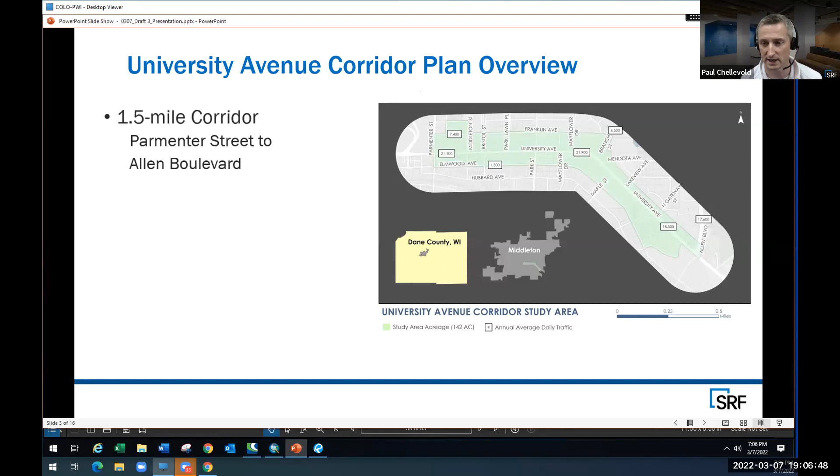We want this to be a corridor for all. We want it to become less auto-centric, or if it's going to stay as auto-centric as it is, we at least want to put in recommendations to increase transit use. So a little about the corridor itself: it's 1.5 miles, including Parmenter Street on the west, traveling eastbound towards University Avenue to end at Allen Boulevard. We included 1 block north and 1 block south, so Franklin and Elmwood Avenue, and considered some of the development around Middleton High School, understanding how people access the school and use University Avenue as part of this.

As we put this together, we put 5 chapters in front of you tonight. After a brief introduction of why and what we're planning for, we set up the existing conditions to really set the tone for chapter 5, the recommendation. So the existing conditions preface the recommendations that will come through chapter 5.

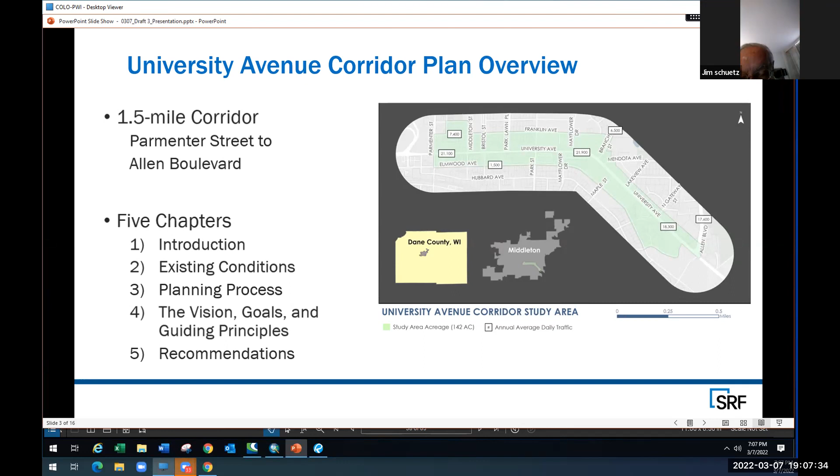We included a comprehensive and robust planning process throughout, and I'll explain the elements we did to include that and the feedback we received. We also wanted to develop visions and goal statements, aspirational principles over the 10 to 20 year time period.

As I discussed the planning process, we really began back in July, and it kicked off with a half-day kickoff meeting and ad hoc meeting. Council put together the ad hoc committee that would be responsible for overseeing the development of the document, as well as providing input on the deliverables at various times throughout the process.

That same day after the kickoff presentation, we all put on these yellow vests and participated in a 3-mile corridor walking tour. We started at City Hall, went all the way down the corridor and then all the way back. That was an opportunity for us to collect and hear firsthand the comments from the people who know and live and breathe this corridor the most, to see if us as residents, us as consultants, had a lot of the same opinions, or if there were differing opinions or objectives throughout the way.

Then once we knew what the issues were, we developed a 20-question online community survey. The survey was given on multiple platforms - we used links, QR codes, hard copies, libraries, senior citizens.

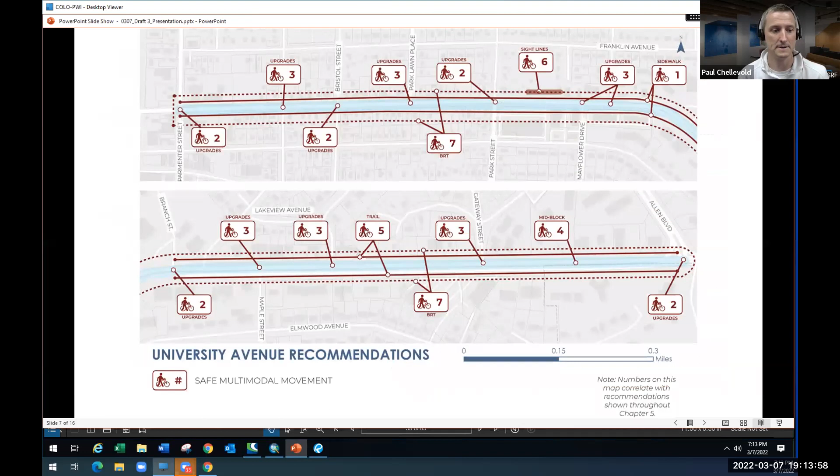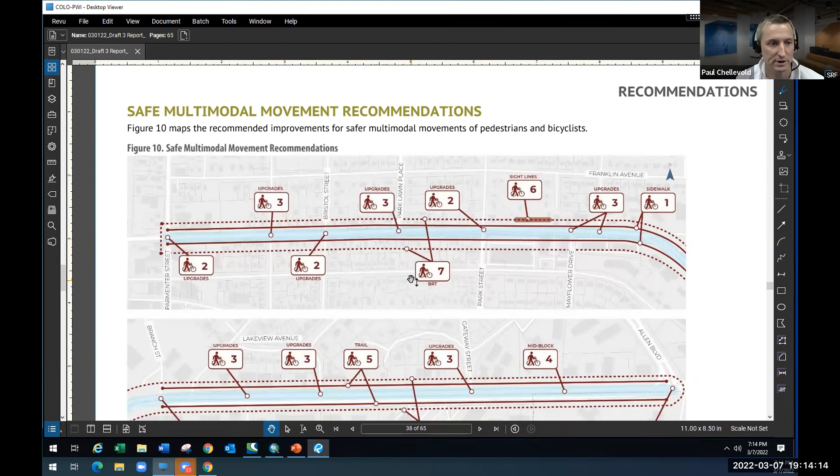Maybe what I'll do here, since it's easier to see for me, is explain the next slides this way. This is straight from the document, around page 38, which is what our agenda kind of focused on—page 38 and forward.

For the multimodal upgrades, before we get into what these look like—each of the recommendations we line up here corresponds to the priority. For example, the sidewalk here is our number 1 priority, and number 2 is upgrades at signalized intersections. You'll see multiple occasions where these would be at the 5 signalized intersections, so just know that each recommendation has one or more locations to go with it.

This helps us see how everything looks graphically, in addition to how these recommendations lay out.

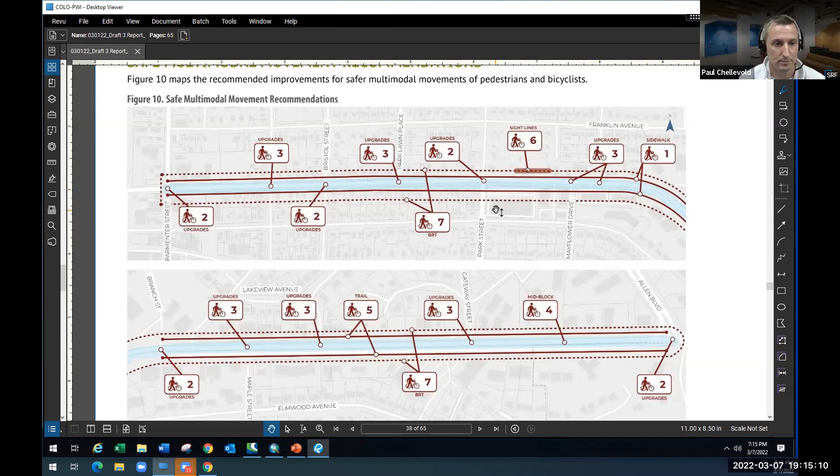Just to give you a flavor of what these look like—each one, like the sidewalk and terrace upgrades, would be the recommendation. We provide a background, which is the reason why we're recommending what we're recommending and why. The corridor location, which in some instances can be a segment or multiple locations. Priority, either low, medium, high, or in some cases unknown. And we give a rough cost estimate.

It should be known that cost estimates with dollar signs are: one sign for 0 to 25,000, two signs for 25 to 50,000, and three signs for over 50,000. Some of these have multiple options, so unknown could be checked, or there might be different cost estimates between each bucket.

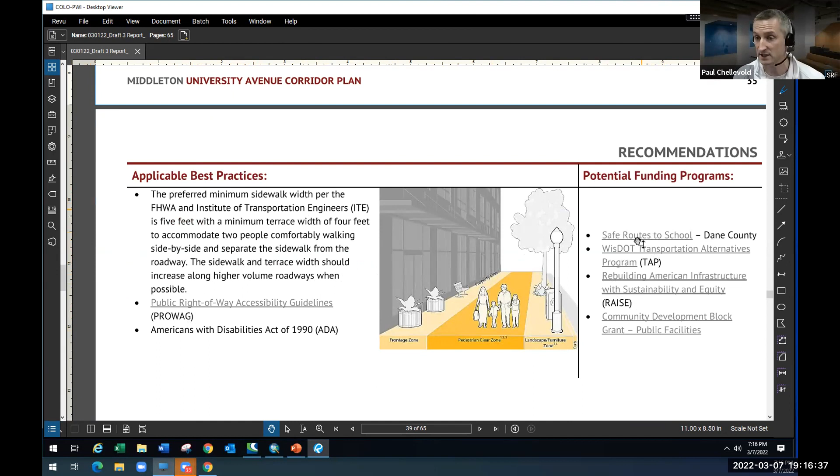For the first one, as we talked about, we go into recommendation details, and in some cases these go into a second page—think of it as a one-page standalone duplex document where we get into applicable best practices, with either an illustration or a reference to material, and where relevant, links directly into funding and grants programs.

I'll just start—I want to hit these at a high level, really wanting your input. There's 7 of them to go over tonight, and the sidewalk and terrace upgrades really talk about some areas in sidewalks.

This is a good example—it meets the absolute minimum accessibility standard. In areas where the sidewalk is only 4 feet wide, we want a wider corridor and wider sidewalks, which equal more pedestrian comfort. Combined with additional terrace width, this leads to a more comfortable corridor for pedestrians and bikes, and also allows for things like public transit components to be added.

It's not conducive in a 4-foot sidewalk for head-to-head traffic—not good for bikes, or in a case where you suddenly get spooked and have to jump out of the way, now stepping right into oncoming traffic.

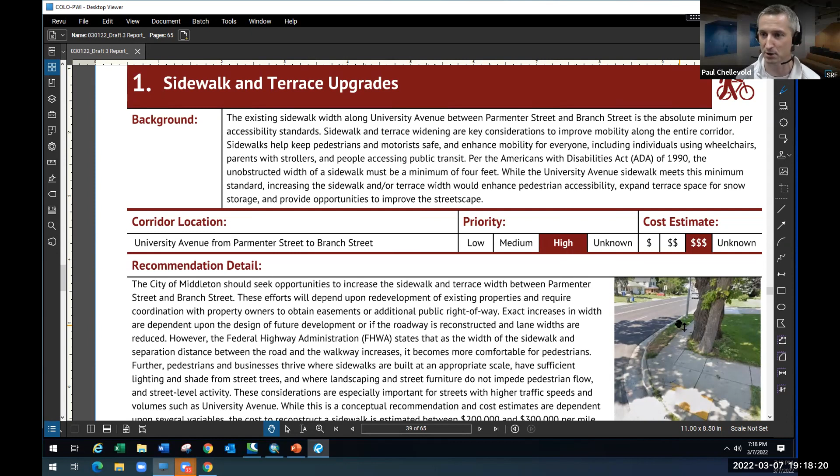It's a potential safety hazard, so looking for things like this. Terrace widths that are really like 1 and 2 feet wide don't provide for adequate snow storage. So in an event like today, the snow plows come on University Avenue and throw it right back onto the sidewalk. If you're a wheelchair user, you may be stuck in a situation where you can't traverse the area. Or the person who's supposed to be cleaning up the sidewalk in front of their home is throwing it right back out onto the road.

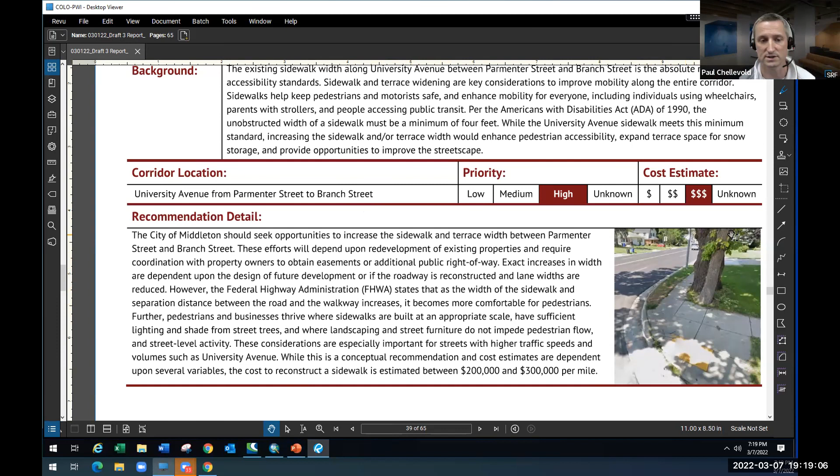Adequate snow storage especially is a concern throughout this area. So the recommendation is to continue to increase sidewalk and terrace widths between Parmenter and Branch Street as future projects and opportunities occur. These can be on a block by block or parcel by parcel basis. It allows not only for safe accommodations, but for artwork, tree plantings, kiosks, or potential street furniture to be implemented over time. There are funding programs to pursue if interested in taking on a larger piece, whether the city wanted to do the whole corridor at once or a half mile at a time. There are some good grant programs out there to explore.

So number 2, this is a fun one. This generated a lot of discussion with our ad hoc committee. There are 5 signalized intersections on the corridor, at Parmenter, Park Street, Allen Boulevard, Branch Street, and Bristol.

Each of these locations has different priorities and different costs based on what we think are the issues there, and the amount of pedestrians at peak hour or peak times or generation. For instance, Middleton High School generates a lot of pedestrian traffic, and Sauk Trail Elementary might as well. Then there's the Park Street intersection, which is just a busy corridor near a grocery store and near some recent development.

These 5 signalized intersections all have crosswalks with differing volumes throughout the process. It's worth reiterating that we didn't go through and collect pedestrian counts - that's something that would need to be done. These are just observations from the consultant team, city staff, and the ad hoc committee to help us say Parmenter, Park, and Allen might be needed more than Bristol or Branch Street, or that the Parmenter Street location already has some good things going through recent reconstruction and investment.

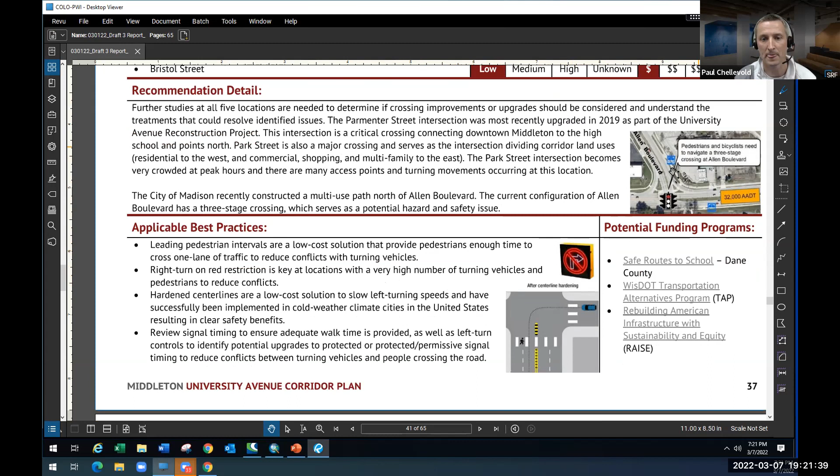I want to pull this example up - this is a kind of cool area. Allen Boulevard, right? We have a recently completed 10-foot pedestrian path in the city at the Imperial Garden. This requires a user right now to make a 3-stage crossing of Allen Boulevard just to get to the other side, which is a potentially unsafe location. Understanding these types of things throughout is very important.

I want to pull attention to some of the different infrastructure that can be used, so you can get a feel for why some of these are not a one-size-fits-all approach. Costs for these things range between $1,000 or $1,500 per crossing, all the way up to $50,000 or even in some cases $170,000. We put together some uses where infrastructure like high visibility crosswalks or pedestrian island refuges might be good locations, and applied those to areas where the city would want to continue further study. I'll do something similar when it gets to uncontrolled crossing upgrades.

Now, these are areas on 7 existing uncontrolled areas that have marked crosswalks, but no other audio or visual cues for those crosswalks to cue the pedestrian to cross. Again, we have different levels of priority.

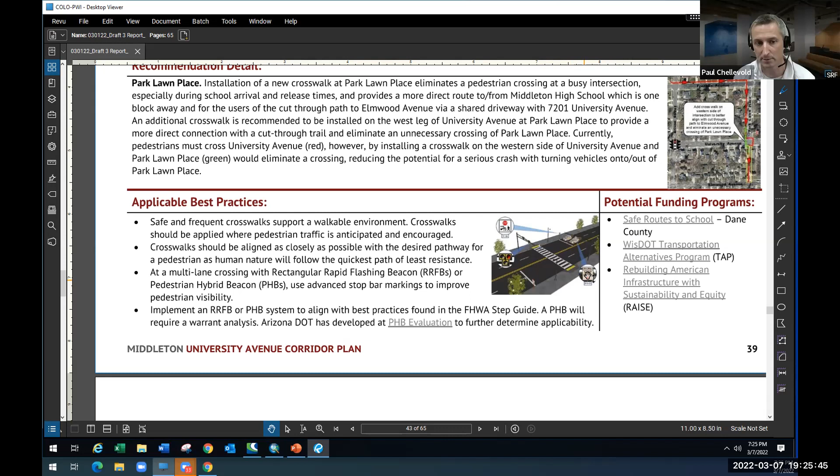This is a City of Middleton street. We can do this. The investment, I will get into in a little bit, but it really does work. You're driving down the corridor, you see a light flashing, you know a pedestrian's coming. You'll slow down at the stop bars and wait for the pedestrian to cross. Very effective, very safe alternative.

They do come with a cost, right? We talked about some of those options last time being $1,000 or $1,500 per crossing. To implement something like this can be $100,000 to $170,000. So that does require a big investment from the city to plan for in their budgets each year to go through. But we did look at 7 different locations throughout the corridor for opportunities for uncontrolled crossing upgrades.

Just a couple more to hit on here today. A mid-block crossing is also something we looked into. For areas from North Gateway Avenue over to Allen Boulevard, we have some recent development projects that have occurred. The Philbin was recently reconstructed. We have the Landell and Lakeview Gables apartments down here as well. And then we're looking for a redevelopment of the parcels just west of the Chalmers Jewelers property. So obviously density is increasing here.

Right now the current recommendations for guidance is that a crosswalk should space about 600 feet, or about a 3-minute walk. Right now, that existing distance on Allen Boulevard over to Gateway is 1,280 feet, or roughly a quarter of a mile. What that is basically saying is, as development and pressures get in, the likelihood of someone walking to one of these crosswalks to come back and load a transit, a bus or something like that, is less and less. People, by human nature, are just going to take the path of least resistance and unsafely shoot the gap and try to cross 4 lanes of traffic or 5 lanes with that 2-way left turn lane.

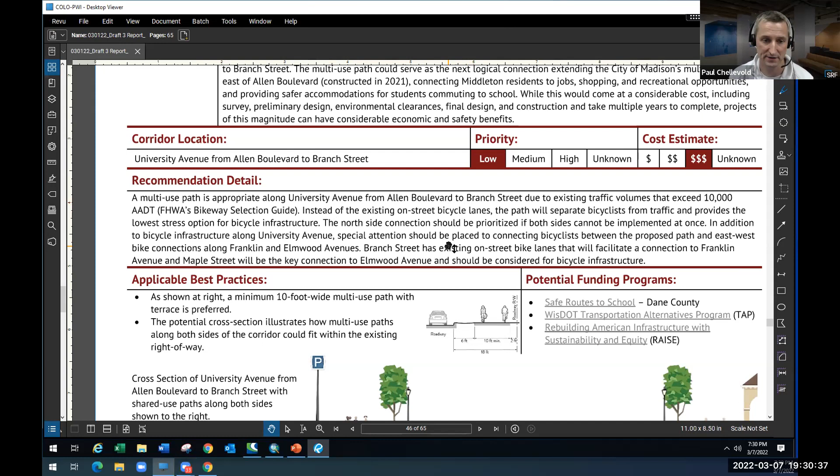But this may make sense for a multitude of reasons. It's for safety, getting people off the road and separated from traffic. It's the next logical connection in a path that goes from downtown Madison all the way westward through Hilldale and connects into your community. It brings a safer connection for Sauk Trail Elementary and safe routes to school, and the multi-use path in that area. It also meets FHWA best practices conditions, for when volumes exceed 10,000 ADT, we look at a separated, isolated 10-foot path. This seems to check a lot of the boxes.

For a project of this magnitude, there are funding programs available and many examples of best practices, including some studies the city has already undertaken for areas across the city in the past.

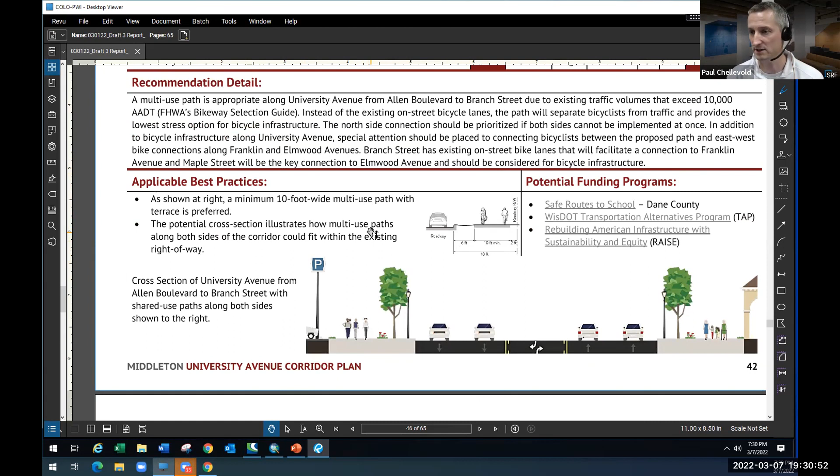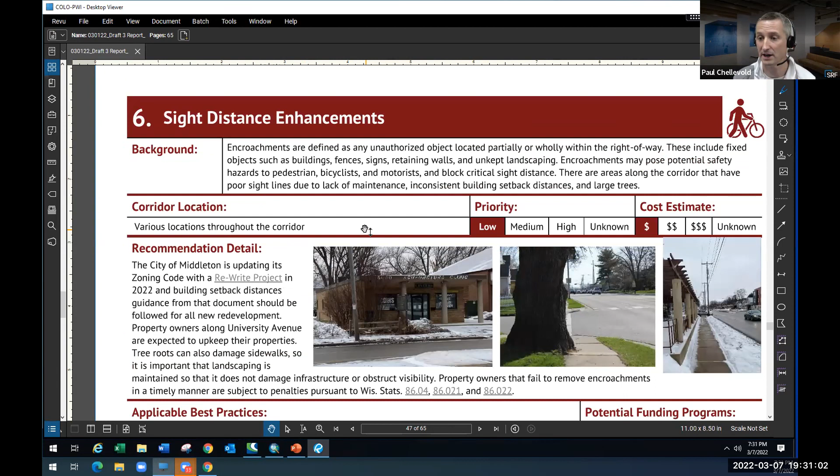The last two, again, these are 6th and 7th on the priority: sight distance, which should always be looked at, and encroachments on the corridor. Obviously you have things like these awesome large trees, and they do potentially cause a safety hazard. I'm not going to tell you to go in there and cut them down, but in the life of a 10 or 20-year plan, a tree or an encroachment might get in the way that we can clean up. We should always look for opportunities to clean things like this, to improve those vision corners and make it a safer place for multimodal.

There are areas like this in front of the Middleton Sport Bowl, where if you're heading westbound on the path, walking or riding a bike through here, traffic just pops out of that Willy Street Co-op, putting a potentially dangerous situation. Just across the street here at Kestrel, that building is brought right up to the road with 25 foot, 20 foot setbacks, and parking behind the building can sometimes jet out. I know construction equipment was doing that when that building was being built. So just being mindful and looking for areas like that to improve upon.

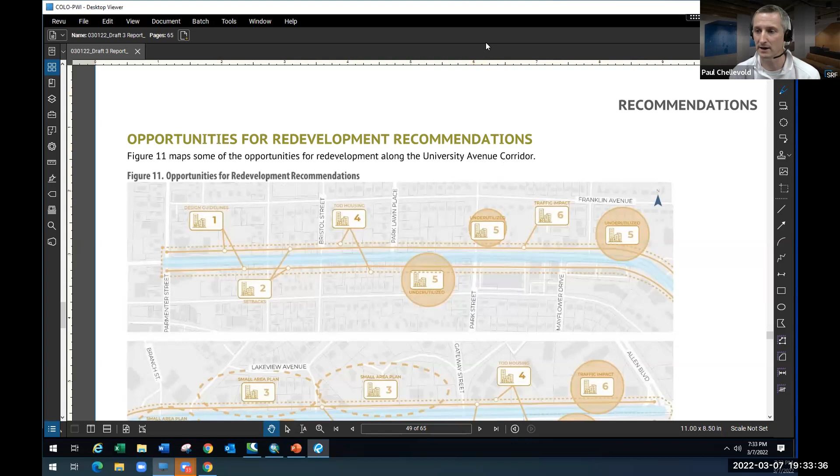That's basically it. As I was saying before, there are 14 more recommendations, but for tonight's presentation I just wanted to limit it to the 7 transportation segments here tonight. So with that, Daphne and I are here to take any questions you have.

Does anybody from Bike and Ped have any questions or comments? I have one question.

You just spoke a moment ago about the Kestrel and the building closer to the road like that. So are we making a mistake? Because when that went through the planning, it was planned that way, and that's kind of the new urbanism. Are we making a mistake by having our buildings too close to the road, or planning our new infill development too close to the road, so that we're limiting what we can do for safety?

Good question, and it is something that the plan does explore. I think the biggest thing is we want to try to develop consistency in that setback distance. It's not always a one size fits all approach, but it's general guidance. We've determined a few examples, and actually the Kestrel is a perfect example, because one building is 20 feet and the very next building next door is 75 feet. So it's kind of the two extremes, and then it moves back to about 25 feet, almost the preferred alternative for setback distance.

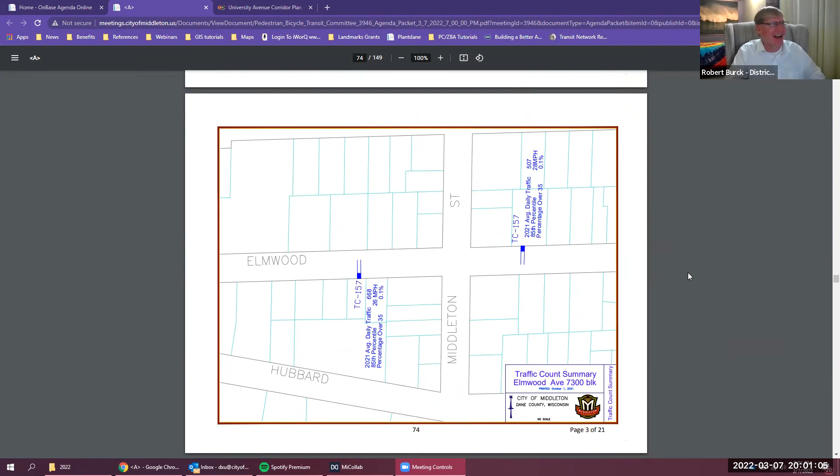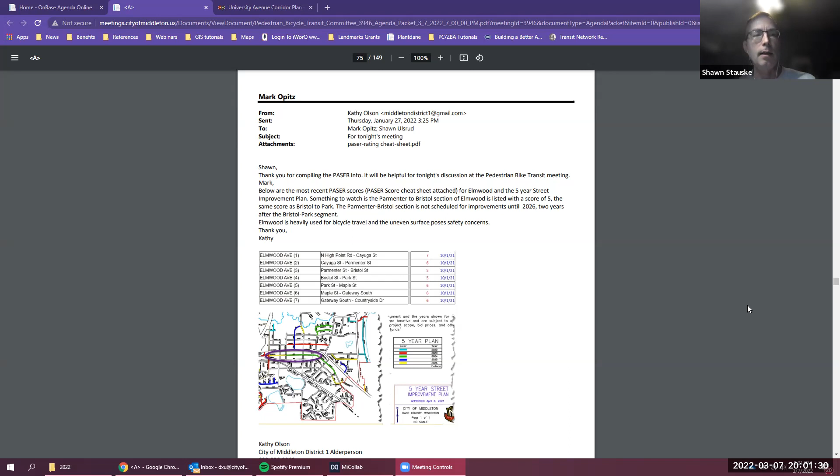I think that's the current 5-year plan, but we're having to retool that because of Middleton Beach Road, that bumped Middleton Springs Drive. And as those puzzle pieces move around with differing dollar values, we're trying to balance that with an overall capital budget limitation in mind. So Sean Ellsworth has taken several weeks to try to rejuggle those pieces, and we're about to find out what that recommendation looks like now. Because annually, of course, we update the 5-year plan, and I myself don't know what the fallout of that is on any given road. But that's one of those things we do each spring, is try to figure that out.

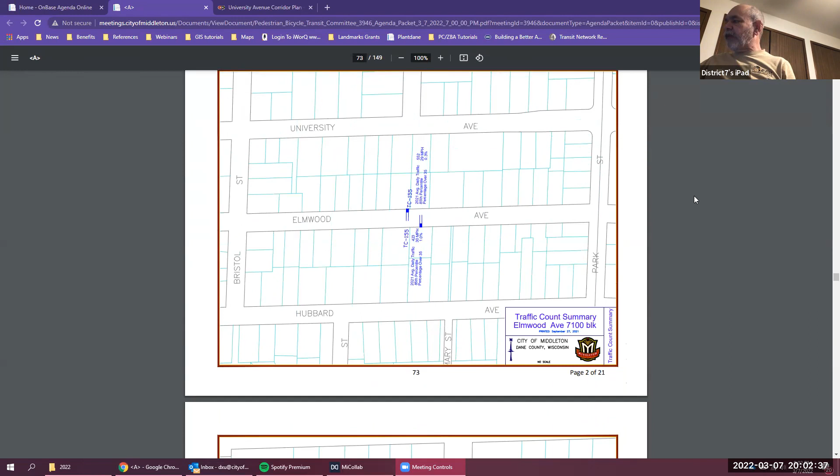Okay, well, fair enough, but if we take it at a higher level discussion then, for roads like Elmwood and Franklin, roads that we were just talking about, and I understand that my example may not be in the plan, but roads that we were just talking about trying to use as bike corridors and transportation pedestrian corridors, what the Bike and Ped was interested in doing was seeing if in some of those long stretches of road where they're long and straight and people have a tendency to speed, we were looking at the possibility of, in the design, when those roads get redone, that we put in some traffic calming measures like what are in our...

What do we call it? Our neighborhood traffic management program. Yeah, that's it. Very good, thank you. Our neighborhood traffic management program. You know, there's way too many acronyms. Well, yeah, it needs more vowels or something. Yeah, NTMP doesn't sound quite right. It just doesn't roll off the tongue very easily. Sounds more like a Teenage Mutant Ninja Turtle thing.

But yeah, exactly. So Maywood Avenue, when we reconstructed that, the design included some traffic calming features. And it wasn't—our normal program is for a neighborhood initiative, so the input is coming from the ground up and not from the top down. But it takes an awful lot of legwork and voting and then budgeting. And if it can be done right with a program, a design of a programmed road, the trade-off is that it's more of a top-down answer, but it's a lot faster and it just gets absorbed in the budget.

So it's the kind of thing, in fact, planning staff really led the charge on converting some of our collector class roads like Parmenter and High Point Road to eliminate parking on one side so that we could paint bike lanes on both sides. Sure.

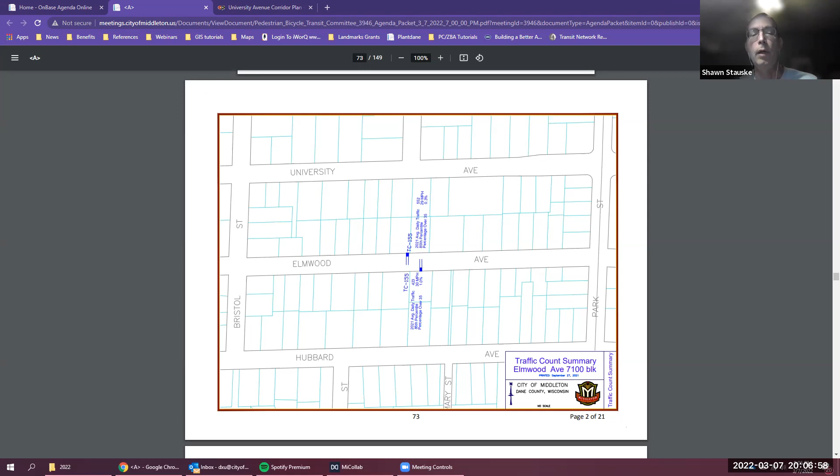So sometimes some stuff gets built, but not everything gets built, even if we look at it as a design. So Shawn, what is the process if we wanted to get some sort of traffic calming that's not terribly expensive, and could be done without rebuilding the road? What would be the procedure, since we've got residents that are concerned and want this? What would we need to do?

Well, it might depend some on what it is, but there are some things that we probably would rather build with the road, knowing that the road is getting reconstructed relatively soon, instead of building it right now and rebuilding it in 2 years. But depending on what it is and where it is, I don't know that without a design. If we follow that alternate process, I would say it takes a neighborhood work group to work with engineering on a design, to get to a vote, to get to budget consideration. And that all takes time. We might be building the road by then anyway.

Katie, you have a question? I do, thanks.

To the Public Works folks, I think when we were chatting about these traffic calming ideas for Elmwood, we were talking about it going into the new sections, and we talked about these calming circles where there's like low plantings of native plants. I suggested that would be a nice combination of our sustainability goals of not having so much concrete. Emergency vehicles can drive right over them.

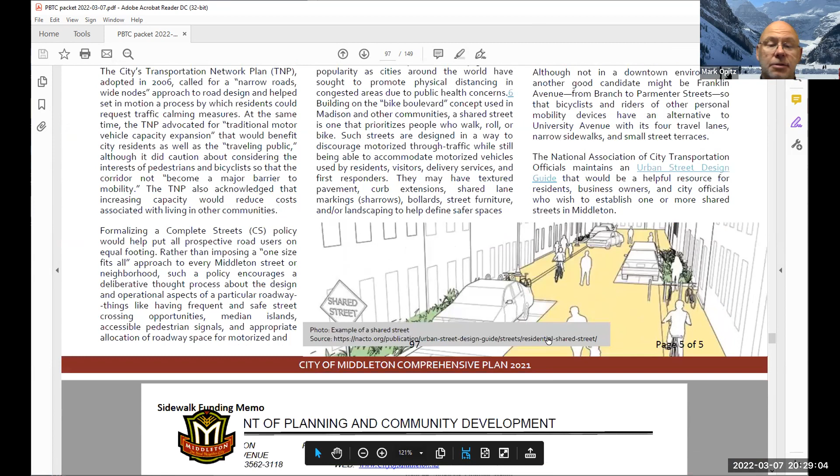Our comprehensive plan, adopted last year, identified the desirability of adopting and implementing a complete streets policy so that the design and operations of the entire right-of-way balance the safety and convenience of all road users, regardless of age, ability, or mode of transportation. The plan has an action statement on a specific page, it's in your packet.

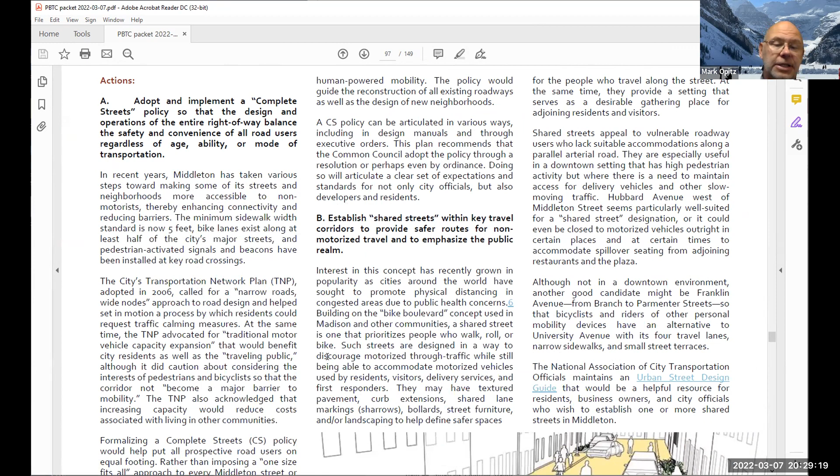Here's the action statement in the left column. That was adopted last year. What I'm providing you this evening are some resources to show what Madison and Sun Prairie are doing in particular. They have, in the last 2 to 3 years, been doing this work. Madison's actually integrating it with the Green Streets concept, and that's an ongoing project right now, something they currently are working on. So it's timely to be discussing what the city of Middleton is going to be doing.

I did check with Fitchburg. They have not adopted a policy. I didn't survey other communities. I kind of felt that was in some ways irrelevant anyway, because this is our comprehensive plan and our priorities for our community.

So the concept of a complete green street versus what Sun Prairie has done, which was just integrating the complete street concept without the green component. There are some model languages, model ordinances, or policy statements available from Wisconsin Bike Fed, nationally the Complete Streets Coalition, and a link on the importance of walkability, a few years old. So that's all I have as background.

Communities have been adopting this primarily, sometimes as an informal policy, but it could be more formally adopted as a resolution, even potentially by ordinance. There's a list here - let me see if you now see this. Do you see what I just opened? No? Yeah, so this is why I struggle with this. I just opened the Bike Fed listing, let me see if I can share that quickly.

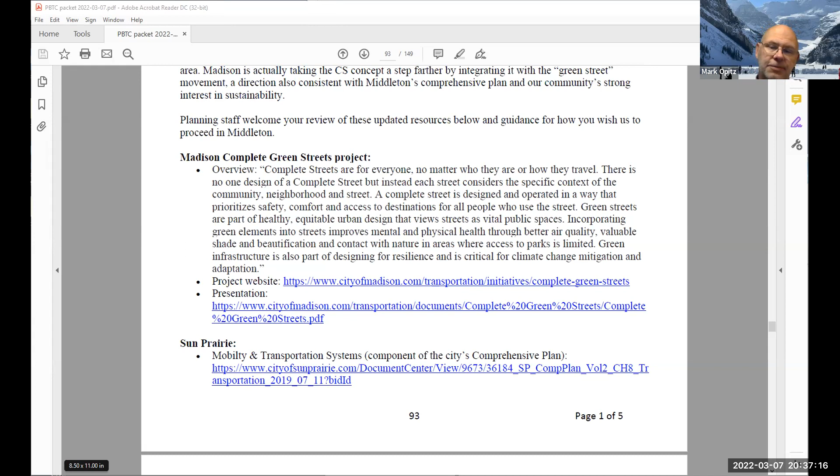And can I follow up on that with a real specific example? Please. Last Public Works meeting, we were meeting with the developer of Bell Farms for the design of Bellefontaine Boulevard. And I am really pleased with that developer - she wanted to make it as safe as possible for pedestrians and bikers, to slow traffic down. And we were having issues with what the ordinance said for the radius of curves.

Our ordinance doesn't allow the curves to be quite as tight as she wanted, for slowing stuff down. So I think we need to have a good policy and even possibly look at some of the ordinances, so that especially when we have a developer trying to build a good, safe street that encompasses all these things we want, it can get done. Yeah, I agree, Susan.

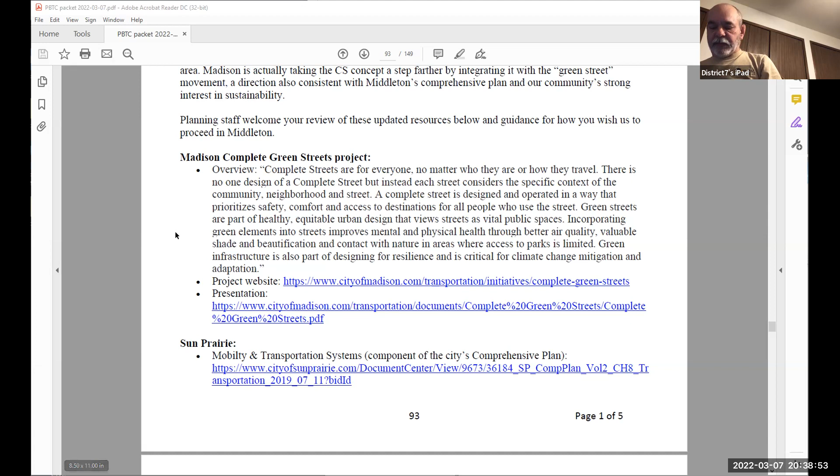So Mark, help us out here. Give us an idea of what the next step is, because I think the committee seems to be in agreement that we want to pursue a complete streets policy. We want a policy that will actually move forward and be used as a document in the redesigning or designing of any new streets in Middleton. So how do we get this to that point?

So I would take the direction, which I'm not surprised by since we adopted it in our comprehensive plan. I think the best way to do this is probably by resolution. I can double check with our city attorney about an ordinance, but I don't see why we would need to do it as an ordinance. I'll come up with some model language. I'm hoping it's one of the shorter ones, not something too comprehensive that lists all the various techniques. I think it's just a clear statement of the policy that at the outset of a street design or redesign process, these are the things planners and engineers should keep in mind as we develop neighborhoods.

Just Mark, to make sure, I think we maybe do need to look a little bit at the ordinances, because we actually got for that street a compromise, and Sean had to put in the minutes that we weren't following the ordinances. So I think as part of this we need to look at that - an assessment of our existing ordinances that might be counter or contrary to complete streets. I think that's a key part of it.

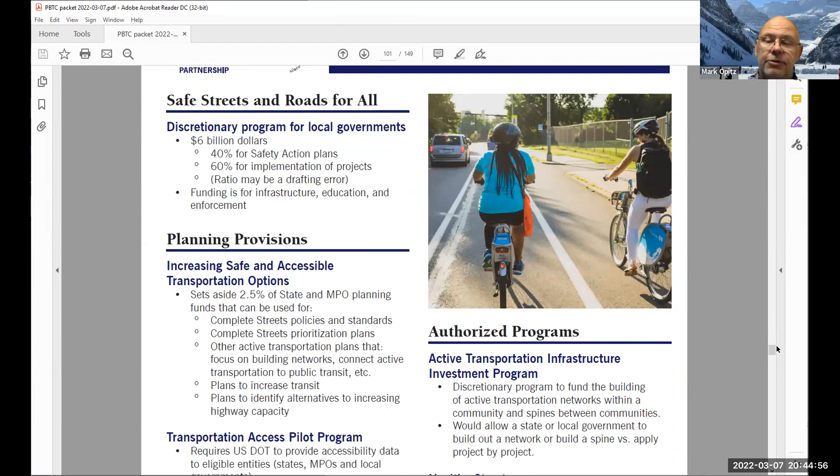I put in your packet that, by benefit of serving on the MPO last week, we started reviewing TAP grant applications, Transportation Alternative Program applications. I noticed a project in Madison I wanted to point out. Where is it? Here it is.

It's called North Madison Safe Routes to School Improvements. As I prepared for and attended the meeting, I learned this is essentially putting sidewalks along a couple of streets in Madison, near a couple of schools north of Warner Park. Madison applied for Transportation Alternative Program funding, and it's being ranked by MPO staff 7th out of about 10 projects, recommended for funding.

So looking at projects on an individual street basis, like Middleton Beach Road, Mayflower, or Forest Glade, the streets we've looked at over the last couple of years, those aren't going to qualify or be competitive. But looking at an area like the business park makes it much easier to frame as a significant project. There are a lot of jobs out there, and people who might not have a vehicle or want to take a walk during their break, which does happen. That's something we've always felt would be important, and it would be the most likely funded project with this program.

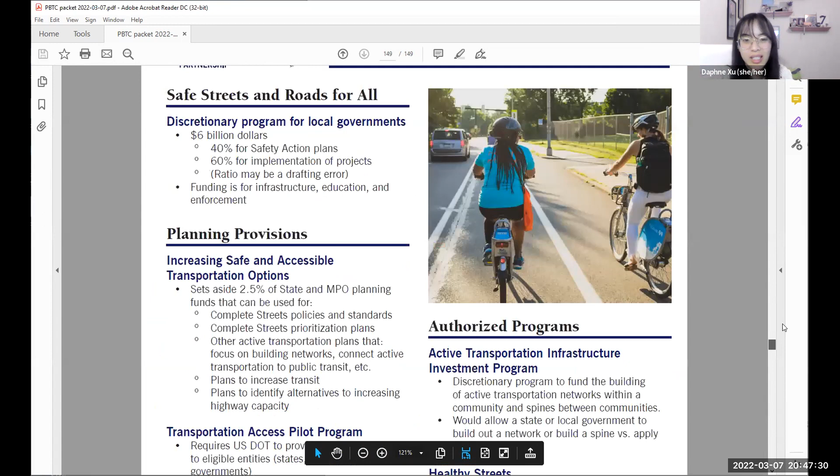I think the main focus is to look at an area, right? Like we were saying earlier with University Avenue, looking at the whole corridor as opposed to, if you remember the map, literally just one block of a neighborhood street. Those kinds of things aren't going to score high on a lot of grants, but if we look at the whole industrial park area or something like that, it could do a lot better in the scoring for grants.

Okay. Thank you. Any questions? Okay, if we have no questions, Mark, do you have any updates?

No, but I would like some feedback from the council members, not just questions. I'd like to know more about any direction you'd like to provide, because I want to make sure we are answering the question you asked us, in regards to funding. I've heard from Alder Ramsey, but I'm wondering if there's something else specifically you want us to research, or if you're satisfied. Does this fulfill the request that you made of us?

It pretty much answers the question for me. It sounds like exactly what you said for some of the issues we've had recently: funding is going to be very difficult, it's going to be case-by-case, and it's going to need to be a larger project if we hope to get any kind of grants. So we're back to where we were: the council will have to make a policy decision about using capital borrowing or assessing the property owners, or we can try and take a shot at applying for a grant, for example, for the business park.